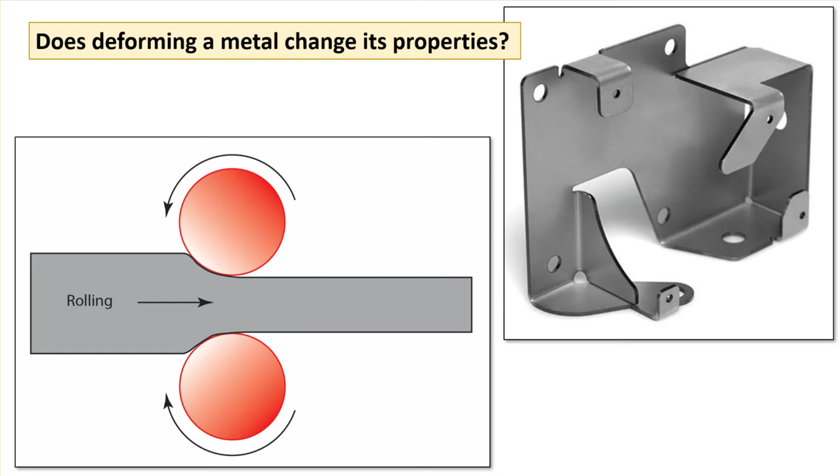So my question to you is, do you think that the metal before it is deformed and after it is deformed is the same? That is, does it have the same properties? The answer is no. The metal will have different properties in the region of plastic deformation. If the deformation happens at room temperature, for example, this is called cold working. So what is cold working? Well, no, it's not working in the cold.

Cold working is plastically deforming a metal below its recrystallization temperature. What is that, you say? Okay, let me back up. We know what plastic deformation is, but what is a material's recrystallization temperature and what does that matter? I think it's best to describe what happens to a material if it's heated above its recrystallization temperature. Remember that all materials have defects. Above the recrystallization temperature, damaged and defective grains and crystals start to repair themselves and attempt to become perfect again.

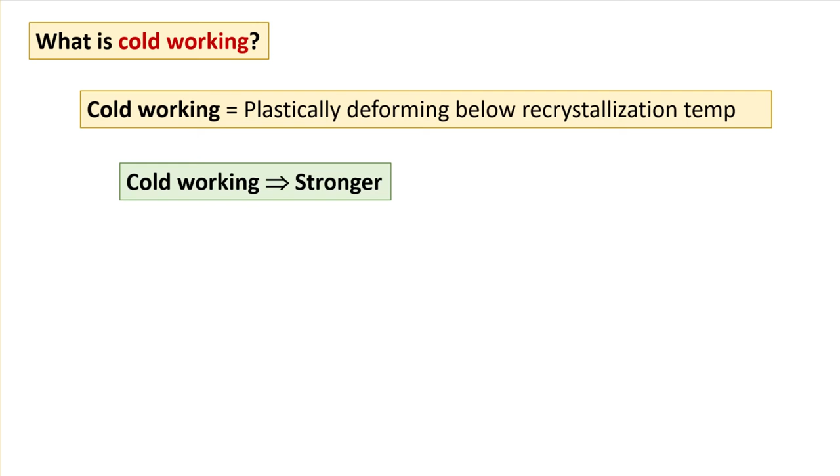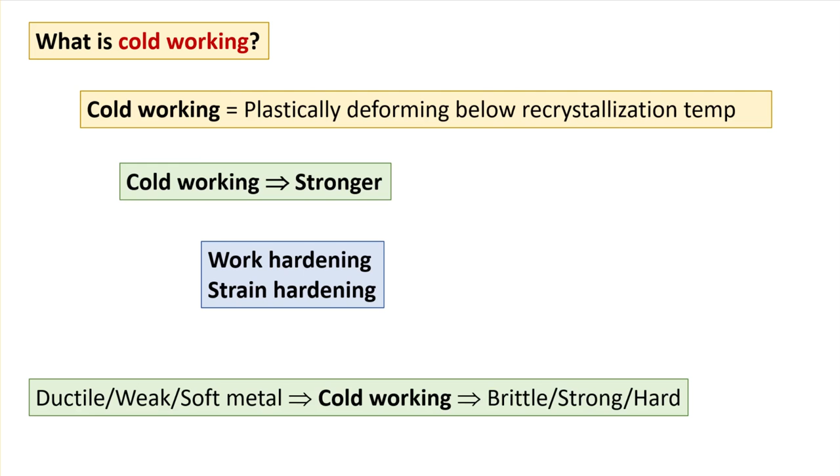So if you plastically deform a material below its recrystallization temperature, you are creating more defects and not allowing the material to repair itself. The more defects you create, the harder it is for plastic deformation to occur, and hence you get a stronger and harder material. This is why they also call cold working work hardening, or strain hardening. If you start with a ductile, not very strong material and cold work it, you can end with a strong, hard, not very ductile material afterwards.

So how do we define cold work? And why would we want to define it? We usually define the amount a material has been cold worked by the percent that it has been deformed. For example, say you have a sheet of metal that originally has a cross-sectional area of 1 inch by 6 inches, and after you roll it, it has an area of 0.5 inch by 8 inch. How has the area changed? It went from an area of 6 inches squared to 4 inches squared. If we calculate the percent change in area, we can use the formula change in area over original area times 100%. That would be a 33% change in area. That is how we define cold work.

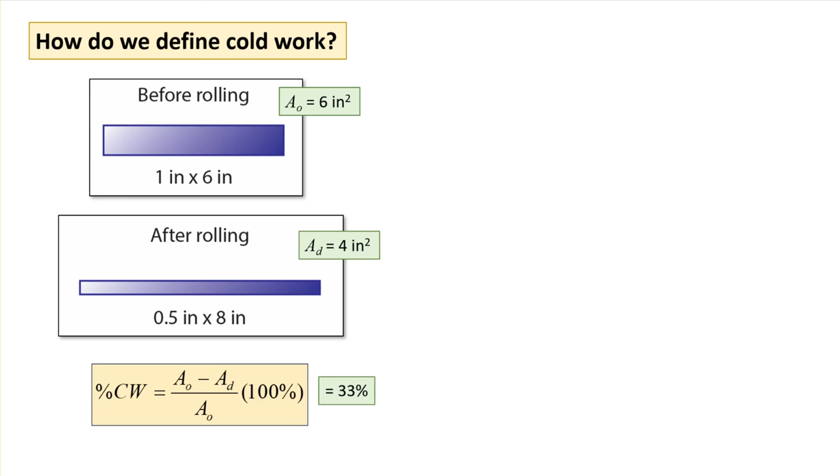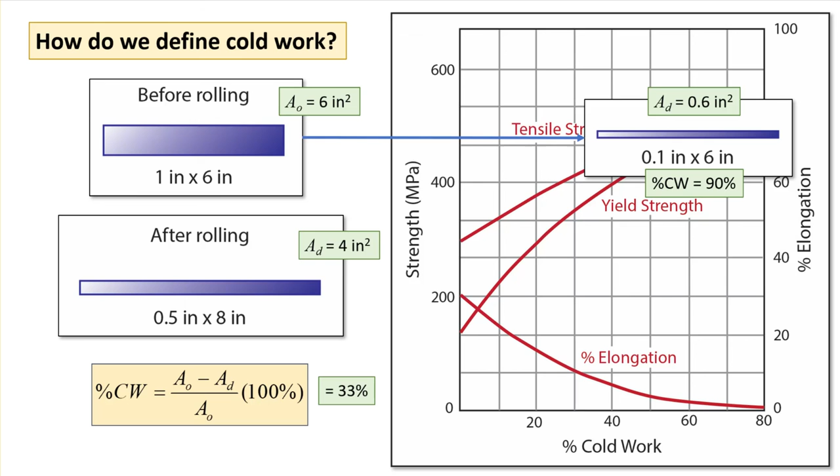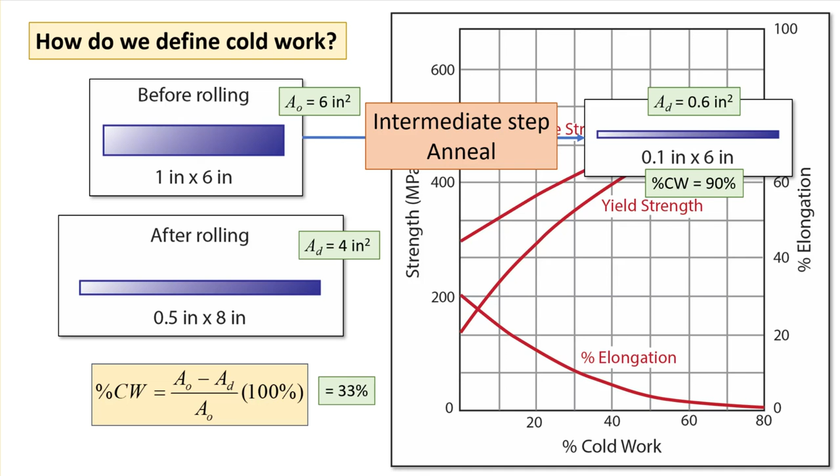So what happens if we want to roll a sheet of copper from 1 inch by 6 inches to 0.1 inch by 6 inch area? That's 90% cold work. It would break. Well, how do we manage that then? Well, we have to place an intermediate step in between and anneal the metal before we can cold work it again. Annealing gives back the metal's original properties and makes it soft and ductile again. Annealing reverses the effects of cold working.

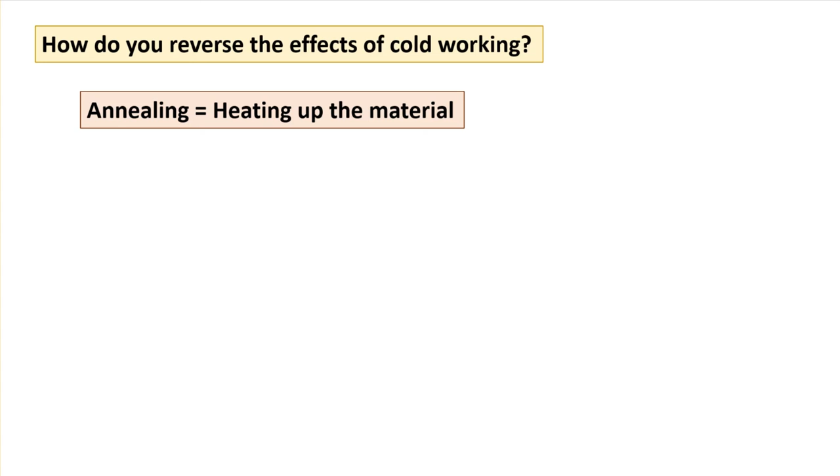But what is annealing and how does it work? Annealing is simply taking the metal up to an elevated temperature and allowing it to heal itself. There are 3 stages to annealing: recovery, recrystallization, and grain growth. In the recovery stage, the temperatures are at the lowest range. Residual stresses start to recover, but the mechanical properties remain virtually unchanged except for conductivity. In the recrystallization stage, as the temperatures rise, the strength of the material will decrease and the ductility will increase. At the highest temperatures of annealing, grains will start to grow. This stage is usually avoided, as this will have a negative impact on the material properties.

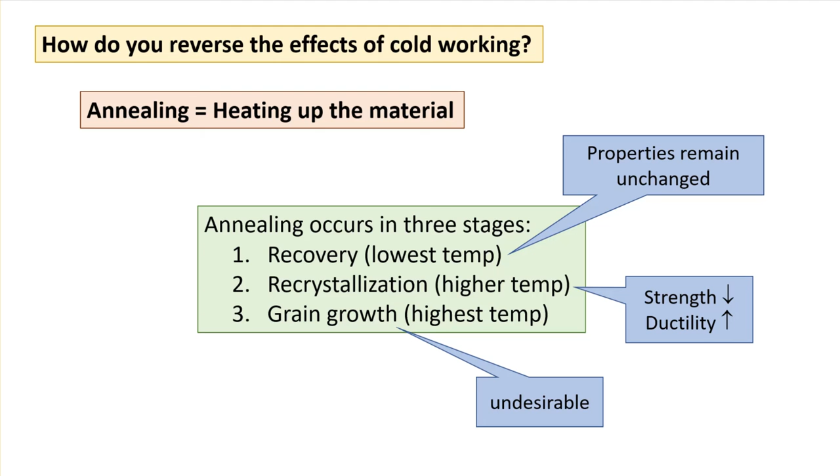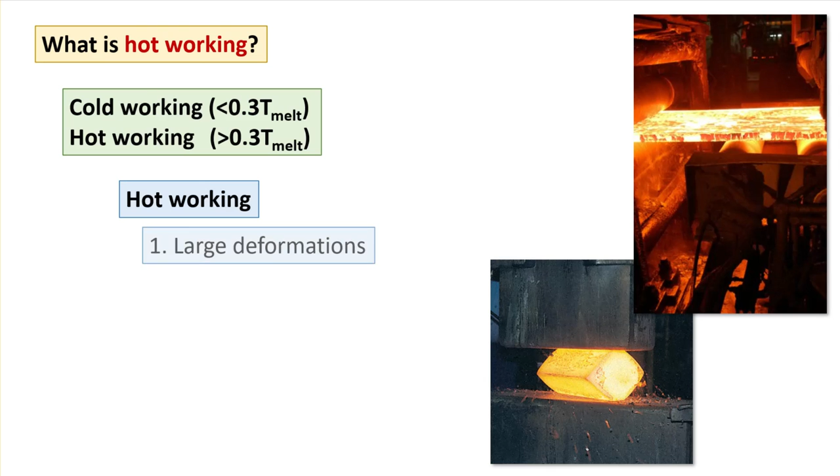You can cold work a material, which means you form it below its recrystallization temperature. But you can also hot work a material, which means that you form it above its recrystallization temperature. In general, cold working is done at temperatures less than 30% of a material's melting temperature, and hot working is done at temperatures above 30% of a material's melting temperature. So if cold working gives you a strong material, why would you want to hot work something? Well, hot working a metal allows you to get large deformations without multiple steps and annealing in between, like you may have to do with cold working. It also takes less energy to deform the piece because it's hot and less strong while you're forming it.

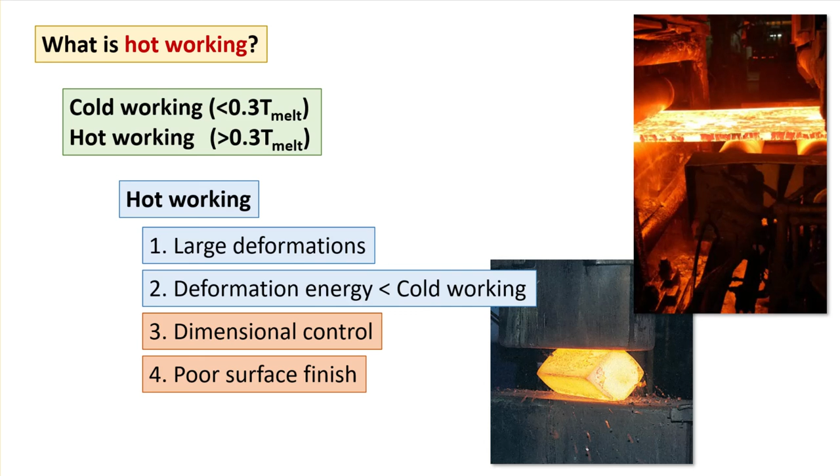Some disadvantages are dimensional control. When you heat a metal up, it expands, then contracts when it cools. You have to take that into account when you're designing the forming process. And heated metals oxidize more rapidly. Do you see the oxide film in the picture in the upper right? This means that the surface finish is worse for hot worked pieces than it is for cold worked parts.